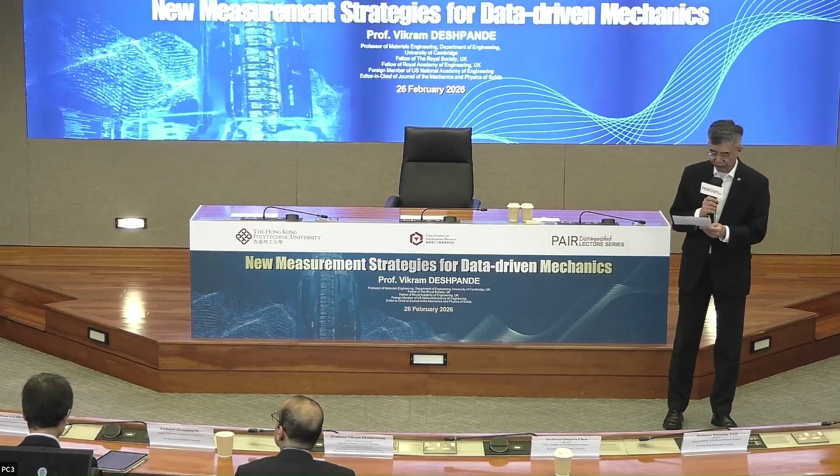He is a leading expert in solid mechanics and professor of materials engineering at the University of Cambridge in the United Kingdom. From pioneering micro-architectured materials with exceptional thermal resistance and toughness to modeling the behaviors of soft and active materials, Professor Deshpande's work has greatly advanced our understanding of complex phenomena in material science, ranging from plasticity, damage and failures in metal alloys, to how living cells and tissues sense and respond to mechanical forces. His team has delivered both theoretical and practical innovations with widely engineering impact.

Among his most notable contributions is the development of metallic wood, by engineering nickel into a porous nanoscale architecture resembling wood, he created a material as strong as titanium, yet 4 to 5 times lighter.

Other extraordinary achievements include inventing new classes of architected materials for lightweight structure, energy absorption, and shock mitigation, and developing theories and tools to improve the blast resistance of land and sea vehicles, and to evaluate the high temperature performance of alloys used in engines.

Professor Deshpande's engineering excellence has been recognized with some of the world's most prestigious honors, including awards from the American Society of Mechanical Engineers, the Society of Engineering Science, and the European Mechanics Society. He is also a fellow of the Royal Society, the UK Royal Academy of Engineering, and an international member of the US National Academy of Engineering.

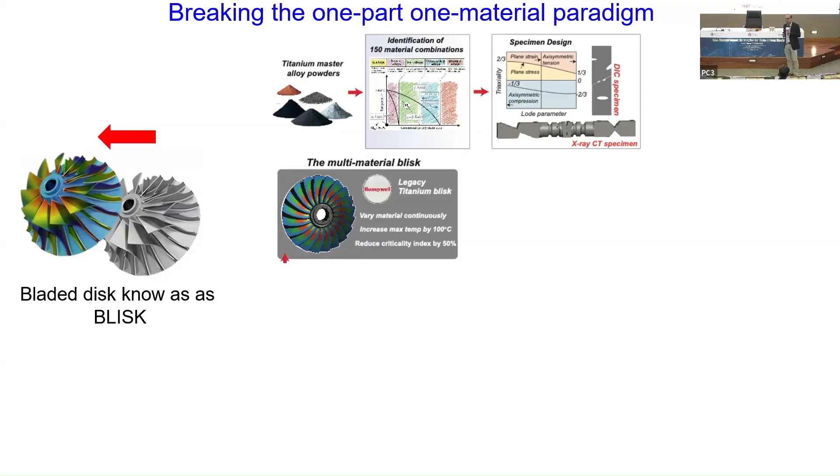Now you can make lots of different alloys by some powder routes, lots of other routes, but now you'll have to measure the properties of lots of these alloys to be able to do this kind of optimization process. So we'll have to do very few measurements, rather than doing lots and lots of measurements. So you make some complex specimen from which you can get lots of properties in one go, rather than having to do different tests.

We'll discuss this as we go along. And then you make these specimens, and then you come up with saying, how do you do these measurements on these very complex specimens?

Because you're trying to get lots of properties from one specimen. And these are different measurement strategies, essentially all X-ray based, and that's going to be one of the main focuses of the talk.

One of the things is because you're doing so many different alloys and so many different measurements, you want some autonomous way to get these measurements into some kind of a model that you'll be using. This is where our data-driven ideas come in, that you don't actually come up and develop traditional models, but you have an autonomous framework.

So that's approximately where these ideas of machine learning come in. You come up with an autonomous way from these measurements to go into a constitutive model. And these constitutive models finally will go into some kind of an optimization tool. That's what you'll then use to close this loop to understand how you can develop a multi-material design, basically, from alloy development to measurements to, of course, the final structural design.

What I'm going to be talking about today is this element of it, which are these measurement strategies. Let's assume that we have got lots of these alloys. How will you actually come up with these kinds of measurement strategies? That's where this whole idea started developing, is how do we come up with different measurement strategies? Because the traditional measurement strategies are too labor intensive, too slow, etc.

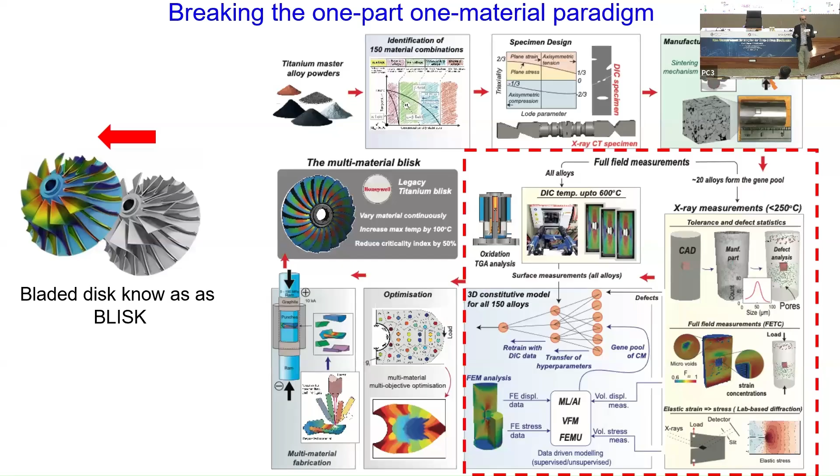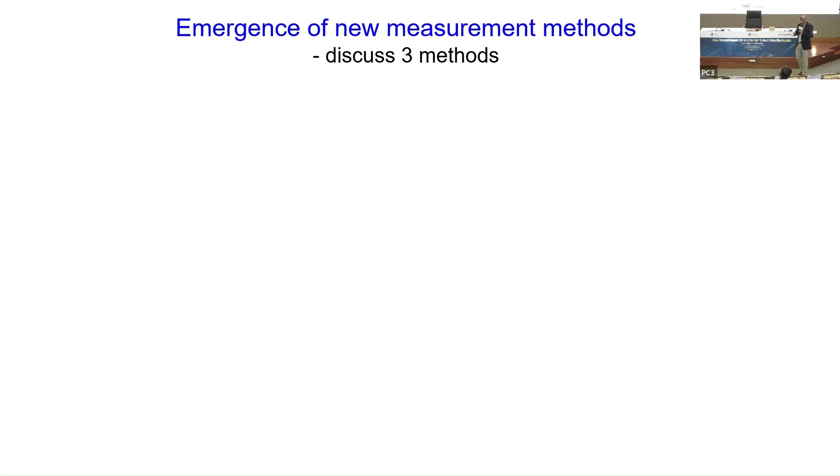Given this, now that that's the sort of broad focus, I may not come back to this problem in any great detail, but I'll focus on this real science that we're trying to do, which is the measurement of measurement strategies. And I'll discuss three methods. Two of them I'll discuss in a very bird's eye view, and one of them where we will basically talk about these physical insights, we'll go a bit more in detail.

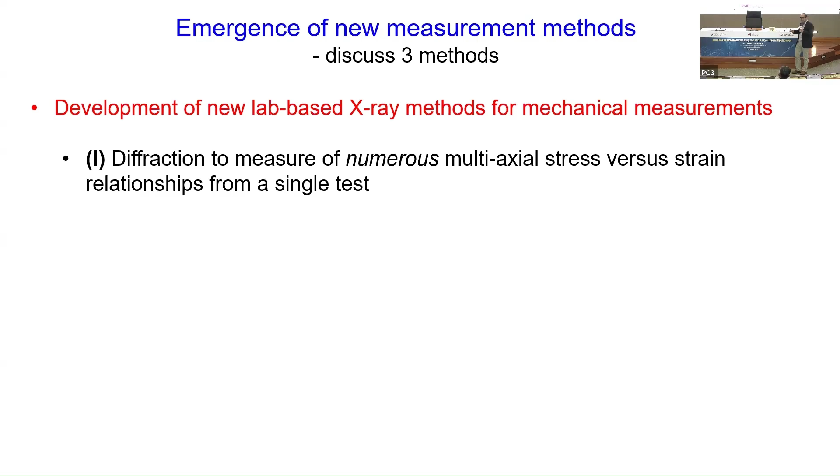So the measurement strategies are all laboratory based. We do not want to go to synchrotrons because we want to do this fast, and cheaply. So they'll all be laboratory based. There'll be X-ray methods. We'll use diffraction. You'll see what kind of things we've had to do to bring some synchrotron technologies into a laboratory for these kinds of diffraction tests so that we can do many, many multi-axial measurements with one test, basically.

We'll do high-speed tomography, so things where we'll be able to do tomography at millisecond timescales. Traditionally, tomography takes minutes to hours. And then finally, I'll also talk about doing 3D digital volume correlations. This is where we will talk about real new physical insights that are coming in, things that we never expected that we'll be able to see.

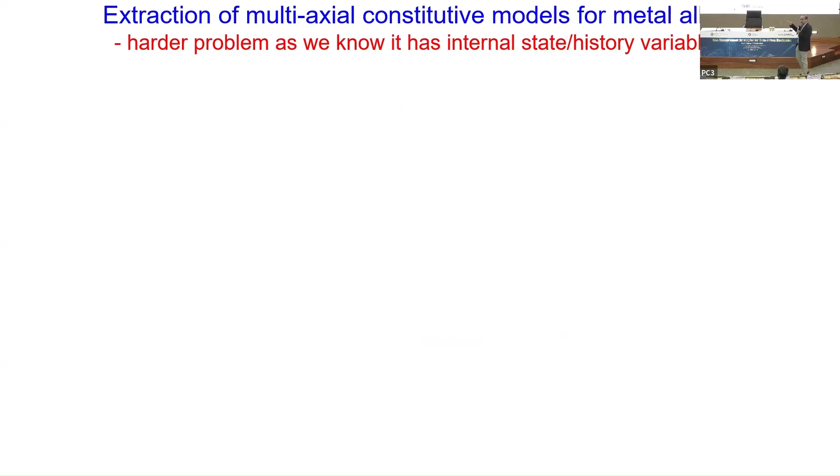Okay, so let's first talk about trying to do lots of measurements from one specimen. I'm giving it at a relatively bird's eye view. The problem is that if you want to extract multi-axial constitutive models from metal alloy, it's a harder problem, as we know that it is full of internal state variables or history variables, right? There's plastic strain, etc. So what has traditionally been done?

So you're trying to do, this is a multi-axial curve. So you have lots of these different specimens, giving you lots of different stress states. And so typically to do this kind of measurement, you need to do 50-ish tests or something like that, which takes too long.

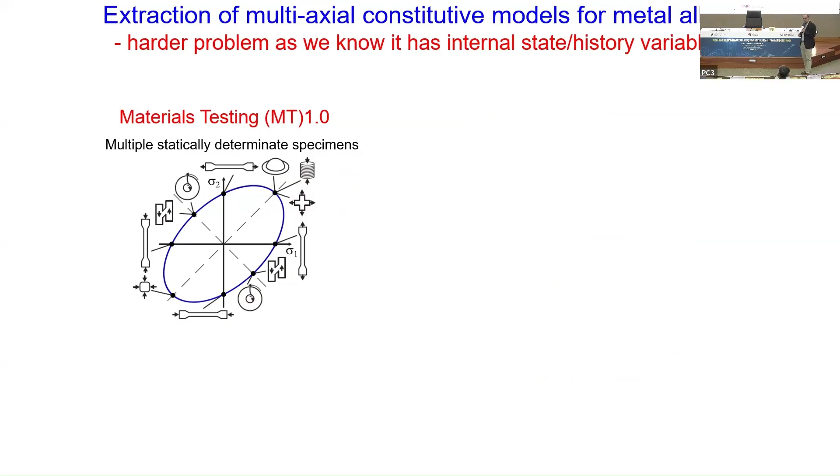An alternative method, which has been used now for the last 20, 25 years, maybe a bit more, is you design one statically indeterminate specimen. So you have effectively lots of multi-axial states triggered in this one complex specimen. And when you do that, then you can sort of maybe extract out these multi-axial properties from one specimen.

The problem here is that you only use what is called DIC, which are optical measurements. You look at the specimen and you basically say, what are the strain fields? This is like PIV or something like that in fluid mechanics. The problem with that is that you now have measurements of the strain, and now you're trying to extract what is the local stress at every point in this specimen. And that's an inverse problem. That inverse problem requires you to solve some kind of other thing, typically some kind of boundary value problem.

That's typically highly ill-posed, because effectively you are not directly measuring the internal state variables. So the question is, what can you do because this is too ill-posed a problem, and hence you need to do still lots of different measurements.

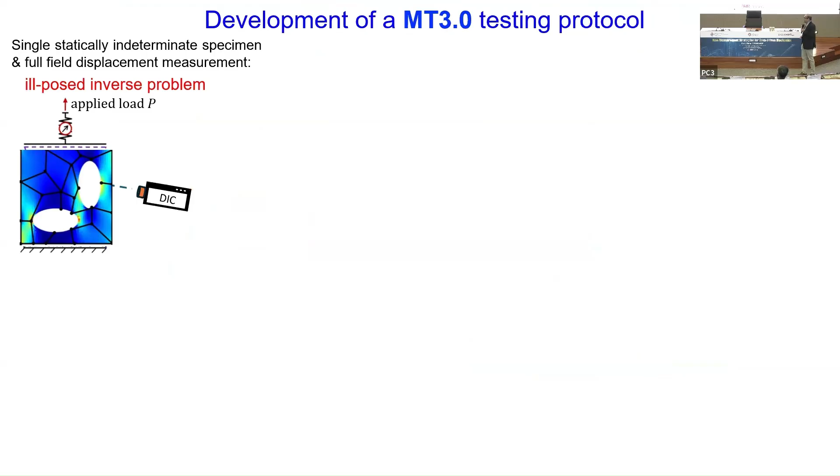So we said to ourselves, can we develop something new? This is the traditional technique, you're only doing optical measurements, and now these are these sort of ill-posed inverse problems. How can you regularize this ill-posed problem?

Well, there's one thing you can do: in addition to measuring these strains, suppose I actually measure the changes in the atomic spacing. Changes in the atomic spacing will then tell me the elastic strains, because that's what's actually generating the stress inside the materials, as the atomic bonds are being stretched.

Now, you can do that by effectively Bragg's law, which is this idea here, is that you have an incident beam, you have a diffracted beam, and basically looking at that diffracted beam, you'll be able to get hold of what is the atomic spacing.

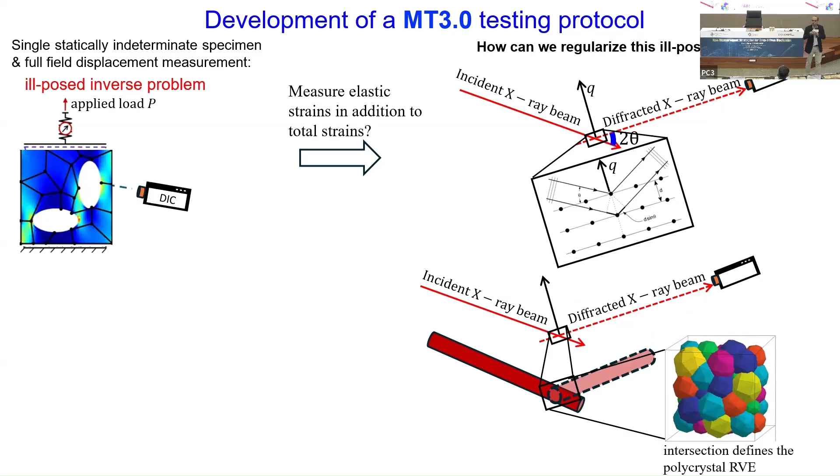Now, in reality, what you do is you don't do it for a single crystal, but just like when you're doing a computation, you define some kind of a representative volume element, which is what we have got here, is that you want to know what is the average elastic strain over that representative volume element inside this material. And that's what we'll do.

And what happens there is, as you load this, the energy spectrum, by Bragg's law, will shift from this unloaded state to this loaded state, and that will give you the elastic strain.

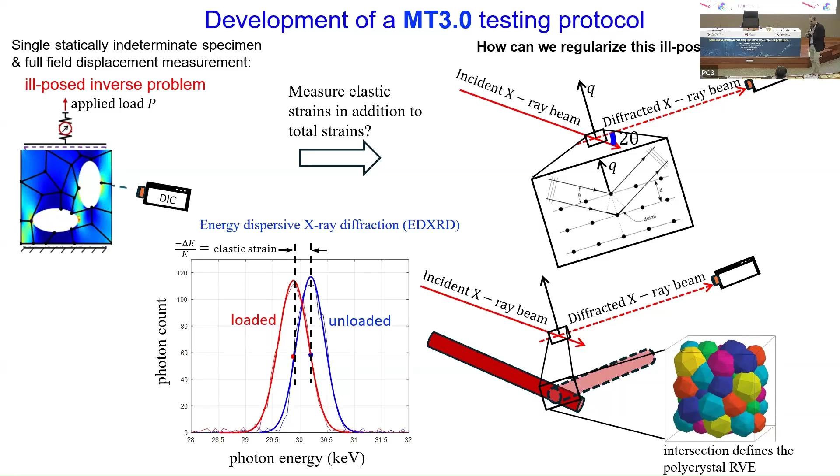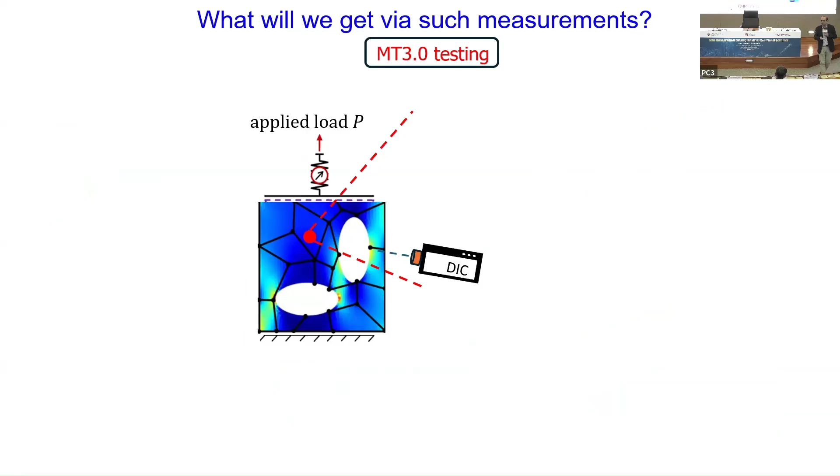So now you've got yourself this rather interesting measurement tool, where if you do this kind of a test, you not only are going to be measuring these strains using something called digital image correlation or something like that, but you'll also be measuring the elastic strains. So the total strains as well as the elastic strains.

That means you know the stress and you know the total strains. And that means that as you start loading this specimen, at every point within this specimen, for example this particular point here, you'll get a multi-axial stress strain curve. At another point here, you'll get another multi-axial stress strain curve. At another point here, you'll get another multi-axial stress strain curve, solving no inverse problem at all.

So with one test, you're going to get lots of these different multi-axial stress strain curves. And that's how you basically have reduced the problem to doing it in one measurement. One test is going to give you all that data. So that's what we are basically saying here.

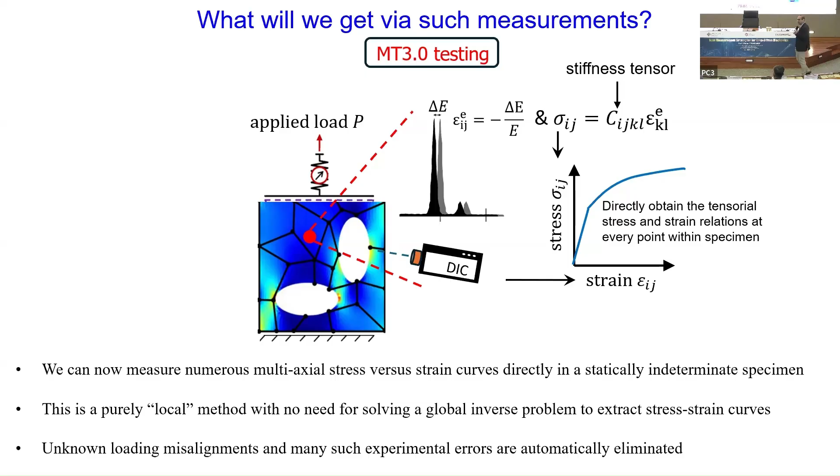And so this sort of, as a theory, is well known. It has been known for at least 50, 60 years, if not more. The question is, how do you go about doing this in a lab? Because you need to be able to do these diffraction measurements.

So this was the first thing, we needed to build ourselves a laboratory facility to be able to do this. Now, what I'm going to show you is a movie in which I will show you the main aspects of this facility that we have built to do these kinds of measurements, because these measurements have not been done in a laboratory before.

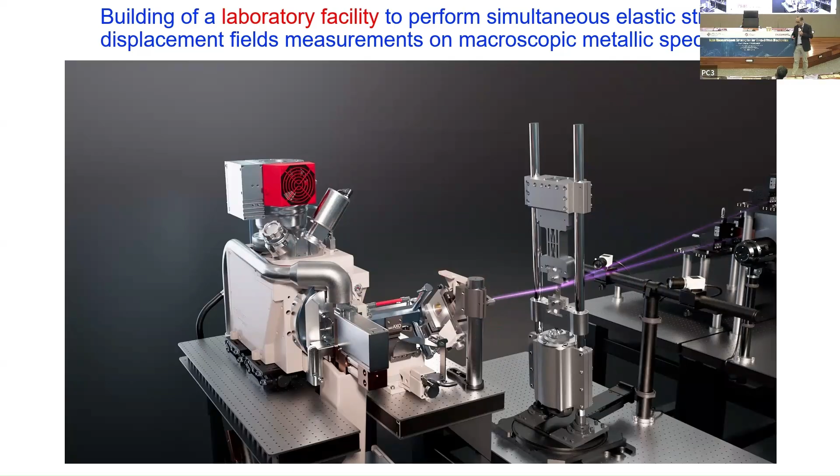Okay, so what you'll see are various different things in this movie. You'll see an X-ray source here, which consists of a metal jet, a liquid metal jet. This will be the loading apparatus, and here there will be detectors, and there will be some sort of X-ray optics sitting here. So let's just look at these various elements.

So what you're seeing here is this is the X-ray source, this is the optics, this is the load frames. We are doing DIC as well, and these are the different detectors. So let's go into that X-ray source.

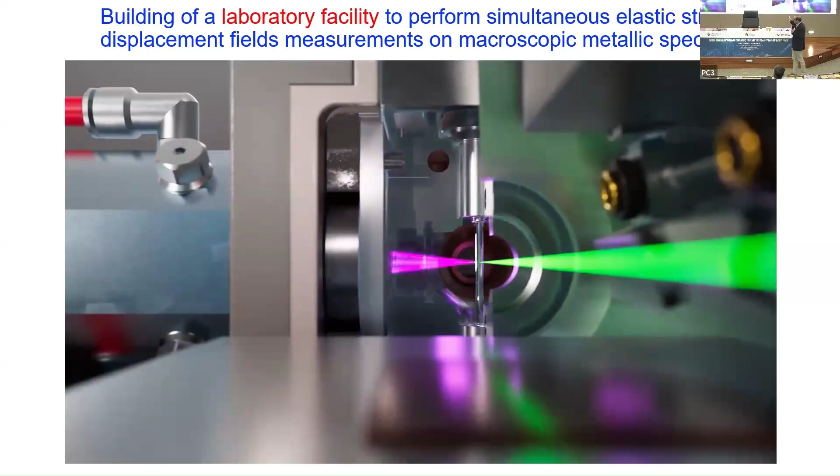That X-ray source comprises of a liquid metal jet, indium in this case, approximately 80 meters per second. An electron beam comes and hits this liquid metal jet. You get an X-ray, sort of X-rays emitted, but they are sort of in a conical shape. You have to collimate it.

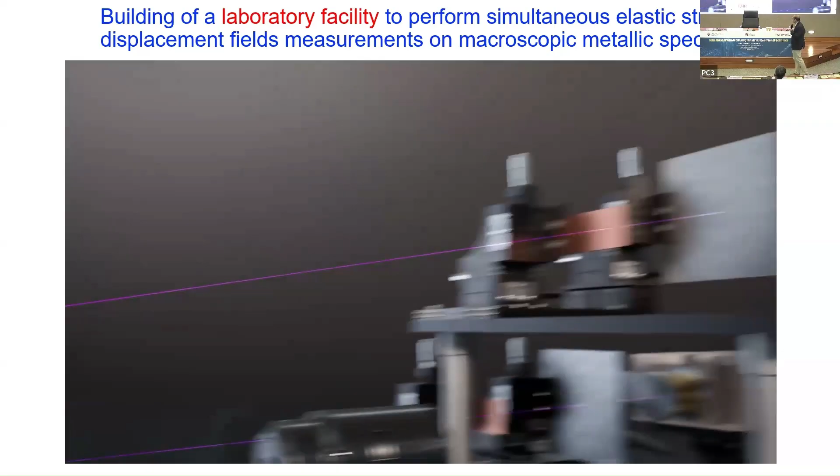And then as you get these collimated beams, they go into this specimen. They will hit this specimen. The X-rays will diffract from all these crystals, which are these crystal planes that you're seeing here. And they go into these detectors. These are very high efficiency detectors. They've been cooled to a very significant level to reduce noise.

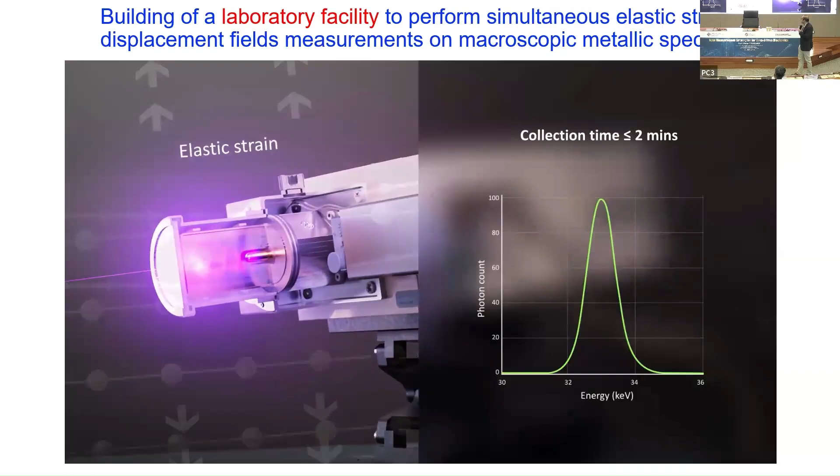And as you load this specimen, you have first this normal diffracted beam. As you load it, the spacing of the atoms changes, and the energy spectrum moves. And that is essentially how you can then get hold of the elastic strains. And then you can get effectively all this data throughout this specimen. So that's this idea about this facility.

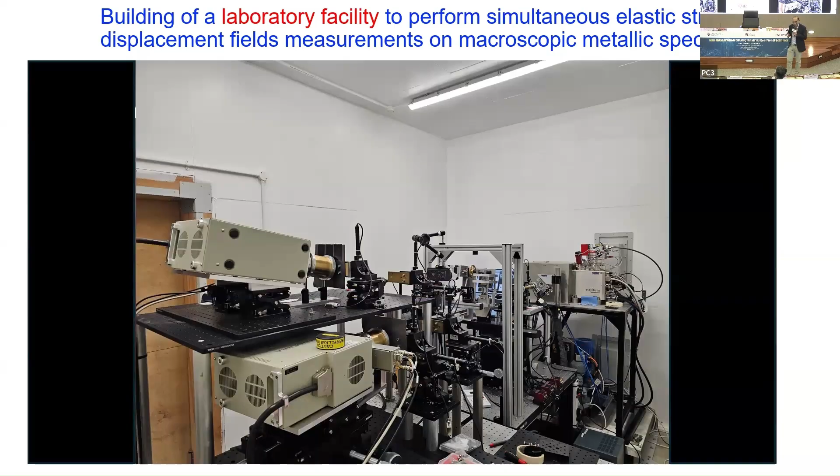And that's what it actually looks like. It doesn't look as fancy as that movie, but that's what it actually looks like. So that's what we have done. And so this is what you can get.

For example, if we have this kind of specimen, a notch specimen, at the root of the notch we get these multi-axial stress strain curves. What I'm showing you here is the measurement, these black things, and two different classical plasticity models, the best possible classical plasticity model we could come up with. It doesn't do that great a job predicting the strain hardening behavior. That's the yield surface we're showing you. This titanium doesn't behave like a typical von Mises material, as we call it in plasticity theory.

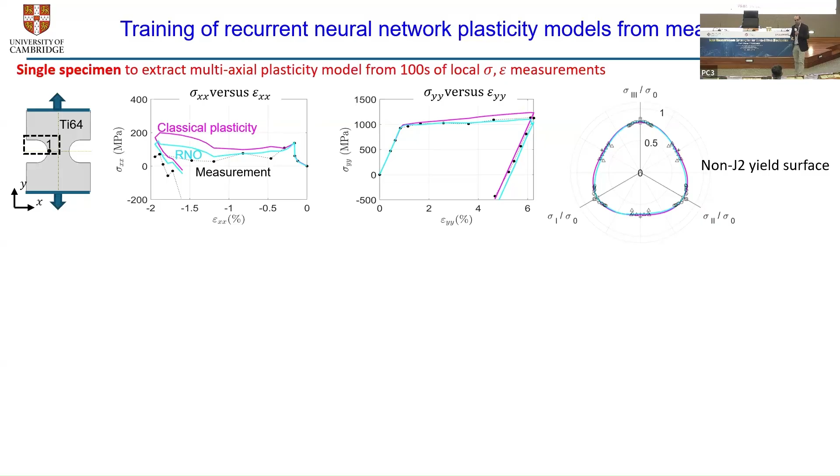We've also developed what's called a recurrent neural operator model, a neural network model. This is the comparison between the experimental data on the top row and the neural operator prediction of what that curve looks like. We used only one specimen, a simple notch specimen, to calibrate the model, and then validated it against this more complex specimen. This was an autonomous framework, going from one measurement to automatically generating a plasticity model without any real intervention. To the best of our knowledge, this is the first time from real experimental data using a single specimen that this kind of thing has been done.

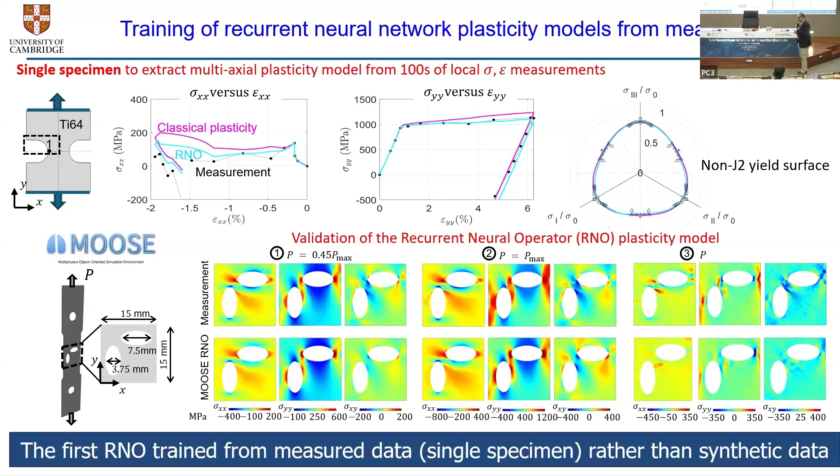So this is a bird's eye view of the first aspect I wanted to show, that you can now develop these tools which generate huge amounts of data. I didn't go on to tell you how much data is being generated, but one particular specimen gives you plasticity data of many megabytes, I'll call it, but actually the information content is much higher than just being in terms of bytes.

So the next thing I'll talk about is high-speed imaging, in 3D, or what I'm going to call 4D, because it's 3 dimensions in space and 1 dimension in time. The point is that now we are going beyond what can be done even in synchrotron.

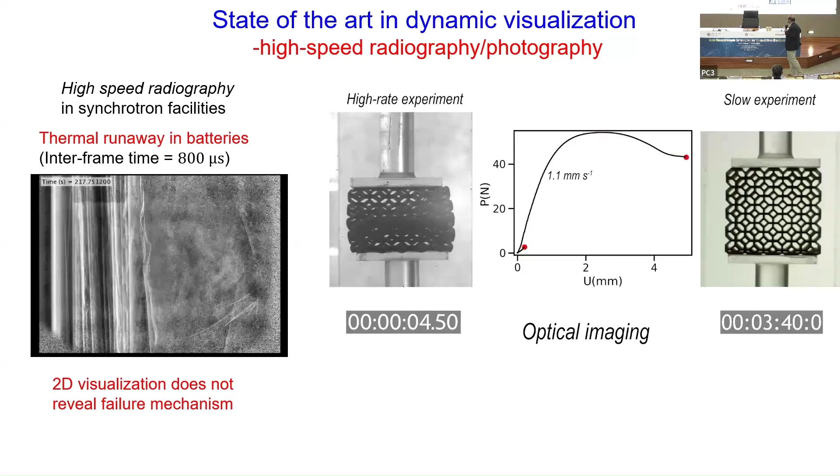There was no softening in the slow case. But if you closely observed that optical imaging, the deformation mode looked the same in both cases. So the slow mode and the fast mode look the same. But there must be something different, because there was softening occurring in the high rate deformation, and the slow rate deformation was not giving you softening. But the 2D imaging, which is essentially optical imaging, did not tell us what the difference was.

Well, if you look at the specimens in an X-ray image after the whole thing was finished, what you'll see is there was a crush band that formed in the high rate experiment. And that softening must have been due to that crush band.

But what we did not get, because we only imaged it after the event, is we could not actually observe how that crush band formed and evolved over time.

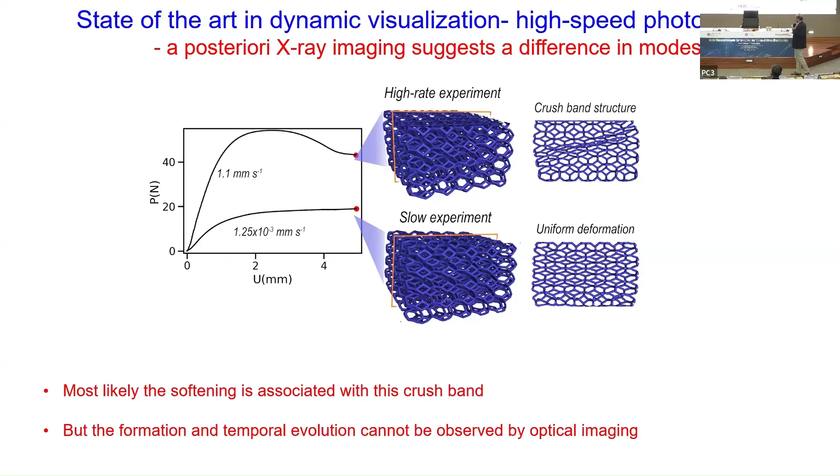So why is it that we cannot visualize this in real time? What is the problem in not being able to visualize in real time? How does tomography work? Why is it so difficult to do it?

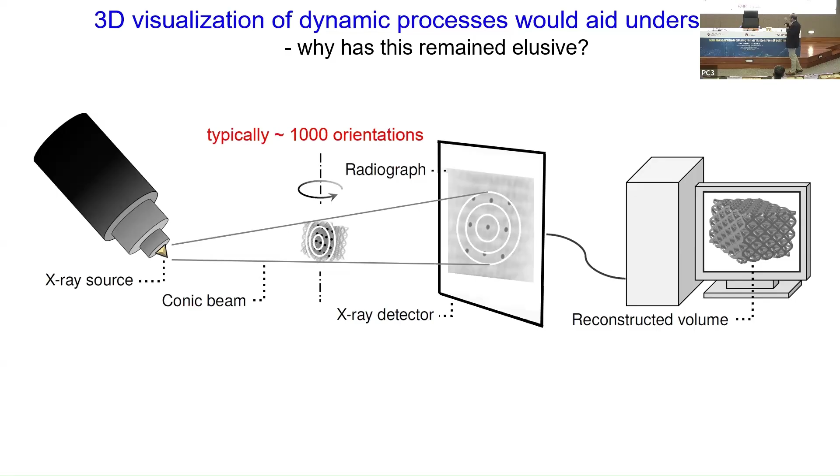In tomography, you take a specimen and rotate it over many orientations, typically 1,000 or more. You use 2-dimensional images, and then you reconstruct the 3-dimensional thing from that. So the key is that you need to take many such images over lots of different orientations, and that's what makes it very difficult to do in high speed.

So the question is, can we do this in a laboratory much faster? Can we do this very fast, i.e. not having to rotate it over 1,000 orientations? And then can we basically do high-speed tomography?

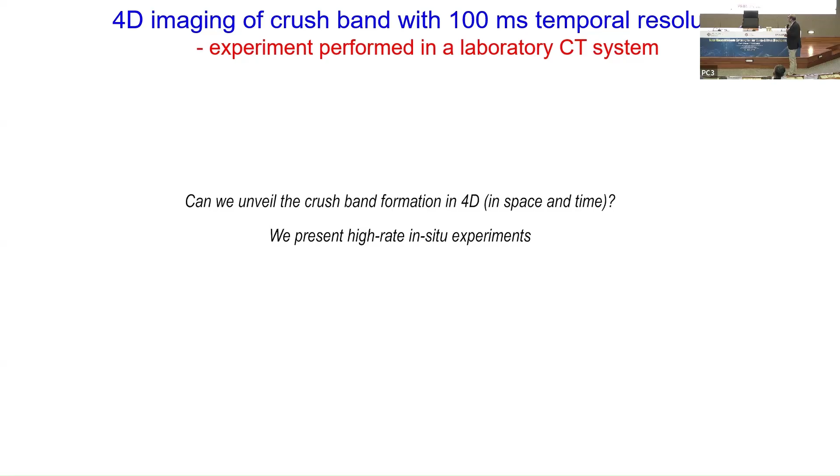So the idea here is rather simple. Of course, the implementation is much more difficult. Let's just see what I'm going to show you here. This is the real experiment we did in the lab.

We were deforming this specimen, and we were rotating it at the same time. At each instant in time, we did not actually capture the 1,000 orientations needed for a full reconstruction, but rather at each time we captured one projection at a different orientation. So the only data we have is one projection at different orientations at every instant in time. This is extremely sparse data, but can we use this very sparse data to do a full 3D or 4D reconstruction in space and time from such a sparse data set?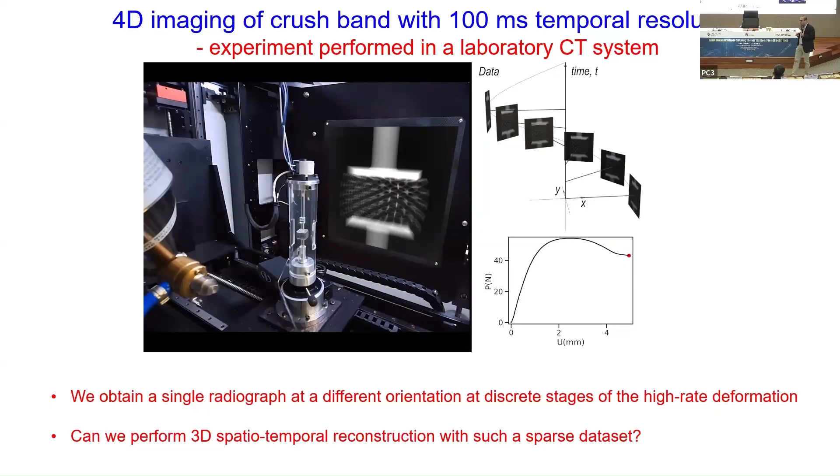At this point, we can bring in physics to see how it is that we can do this reconstruction. The reconstruction is based upon two basic ideas. One is something called neural radiance, which is one of these AI-based image processing ideas. But let's not discuss that in great detail here.

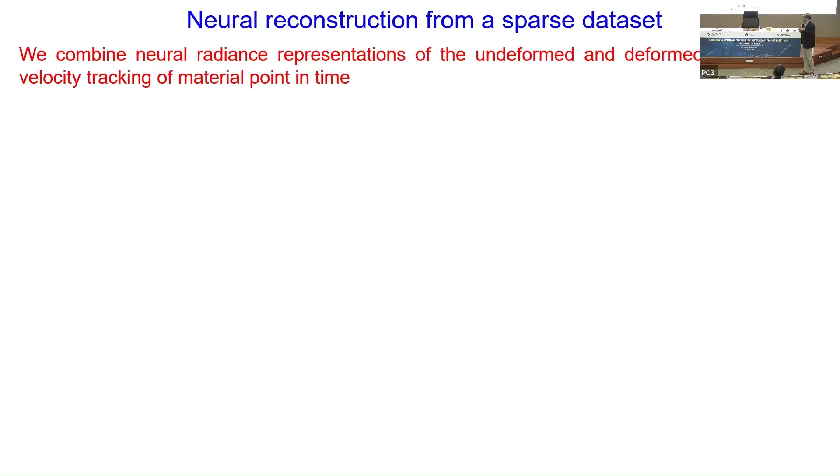The key point is that we have two static images—images at the beginning and the end. They are stationary, so we can get a full reconstruction. But in the middle, we have very sparse data sitting there.

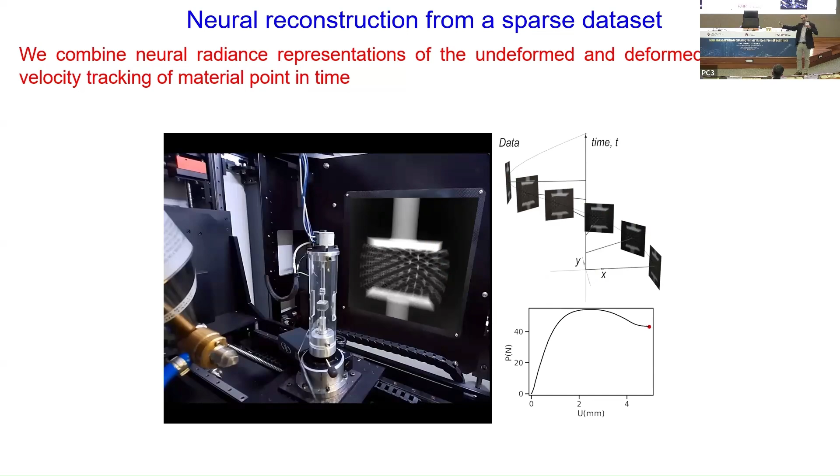But we also have the physical idea that the deformation and velocity fields that the material points undergo will be continuous in space and time. We use that idea of continuity to connect the beginning and the end with the sparse data set we have in the middle. That's what we basically do—we take that sparse data set and do these neural reconstructions.

So how does it look? This is an architected solid, and what we're going to show you here is this architected solid deforming over 4.5 seconds. You'll see that this crush band forms in 3D in a very complex way. The crush band typically forms over 800 milliseconds, and we're going to show you how it happens with a temporal resolution of approximately 100 milliseconds.

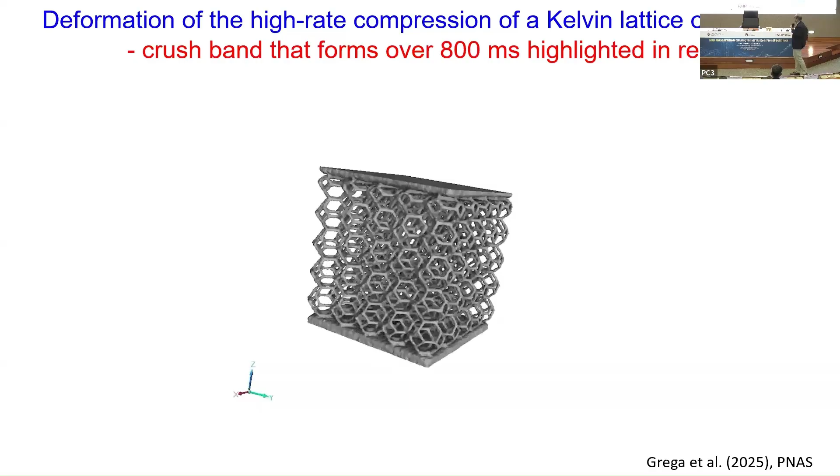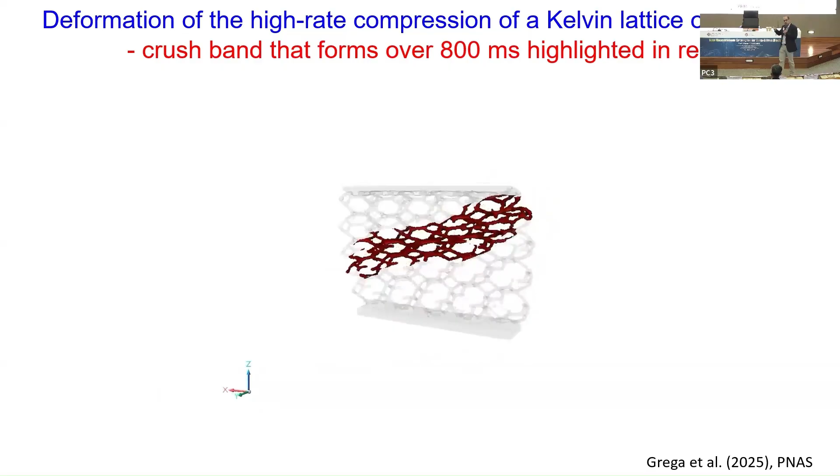So what you can see here is that we've managed to reconstruct this whole thing in a lab with a temporal resolution of 100 milliseconds in full 3D. And we think we can go even faster. This is, again, a combination of physics and these data-driven methods that has allowed us to do this kind of reconstruction.

Okay, so these first two points I was talking about were sort of data-driven ideas, but at a very bird's-eye view. I want to spend the rest of the half hour or so I have to talk about the third problem, where we are going to be doing digital volume correlation, another technique. I'm going to go into this a bit more in depth, because the original idea here was a data-driven idea to collect data in 3D that we can then use to construct models, just like what we're trying to do for the metals.

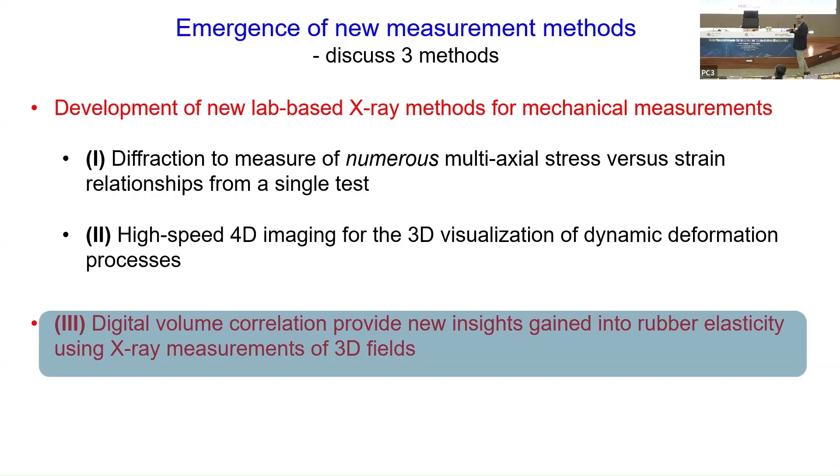What I want to show you here is actually the new physics that we are learning. I don't want to only restrict ourselves to saying that we're just developing models, but the idea is you're also sort of learning new physics here.

So now we'll go a bit more in depth to remind you, for people who don't know about this, what is digital volume correlation. If you want to do full 3D measurements of X-ray, this is essentially going to be using X-ray computed tomography and digital volume correlation together.

The idea is, of course, you have X-ray tomography where you keep rotating the specimen, get these projections, and then you do a reconstruction of the volume.

Once you have reconstructed the volume, in the deformed and undeformed state, here you have this undeformed volume, here you have the deformed volume. You basically are going to try to match how a particular element, which I'm showing here by a cube, moved from when it was within the undeformed volume to how it moved within the deformed volume.

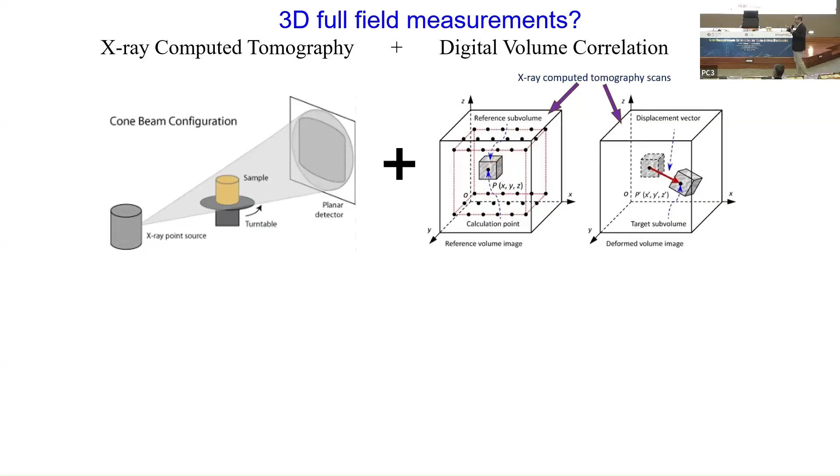If you can get hold of that mapping, at that point you've got hold of a strain field or a full displacement field, and you've got everything there. Now, to do that is not that straightforward. It's not that straightforward because how do you do this mapping from here to here?

You need to do some kind of correlation, which means you need to have some kind of microstructure to be able to actually correlate two images. Now, these are going to be three-dimensional volumes. How do you actually match them? You need to have some kind of a microstructure.

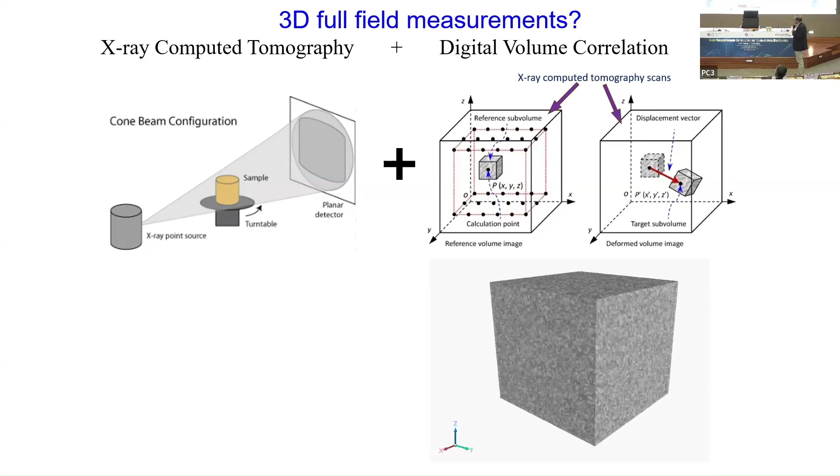Now, I'm going to take a material which has very little microstructure, which is silicone rubber. But when you look at it very carefully, you'll see that it does have a microstructure. So this is a piece of silicone rubber, and if you go deep into it, you'll see it has this kind of microstructure.

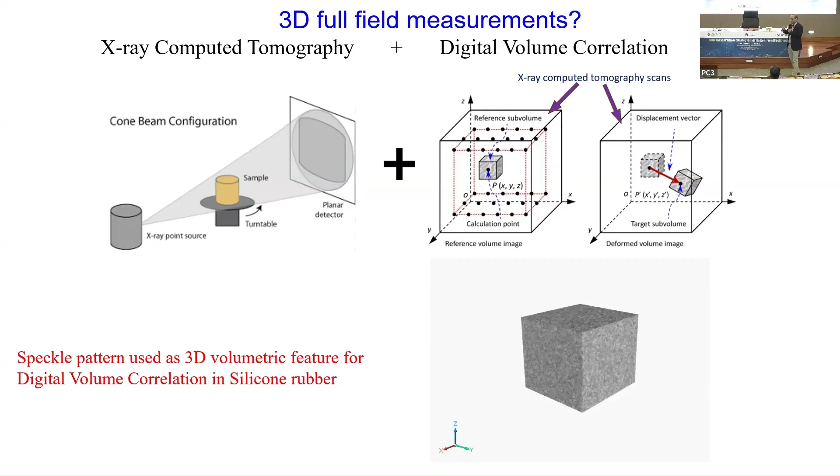This microstructure has essentially what we call a speckle pattern, and it's this speckle pattern that we will use to basically correlate one image to another image. And that's how we will be able to construct a displacement field in 3D.

Okay, so what was the question? I remind you that the original question was to say it is data-driven, so we wanted to develop a model. We were not the first people to attempt this. But what I will say is that I wanted to see whether we can learn new physics in hyperelasticity. Well, that was not the original aim, but that's what ended up happening, basically.

So to remind you, what is hyperelasticity? It's the most simple form of deformation, right? Robert Hooke was the person who basically came up with this idea 400-ish years ago. All that you have is this is a very simple material.

You have something called an energy function, which we call a strain energy density function. It's a function only of the deformation, which I'm calling the deformation gradient, which is F. And if you know that function, W, some complex function of F, then the stress is given by just the gradient of that energy with respect to that deformation. So that's the very basic idea.

So the only thing you have to do in this case, which is the simplest problem, is come up with this function W. Now, the bottom line is that many forms of this exist. The form of W—there's Ogden, Mooney-Rivlin, Arruda-Boyce. These are all the physical-based models that have existed for many years.

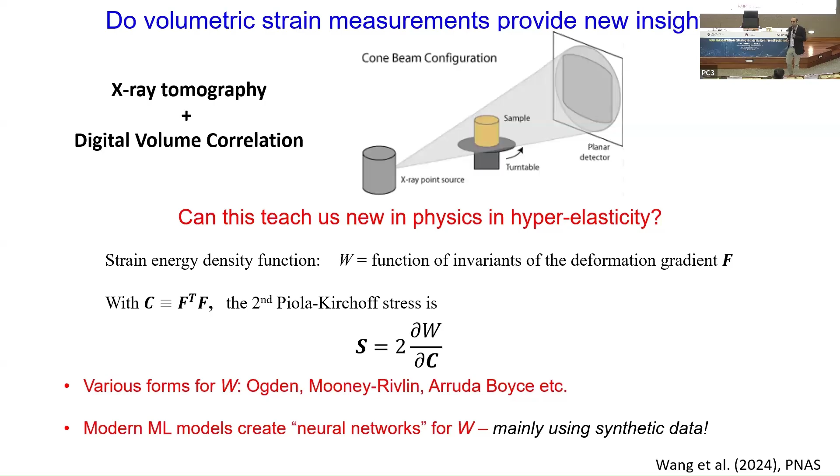This is the field where data-driven mechanics essentially started, and many neural networks have been developed for describing W. As you can imagine, that's a relatively simple task. Of course, they've all used mainly synthetic data, not measured data. And we wanted to see whether we can do the same thing with real measurements rather than using synthetic data. And what you'll see is that we're going to end up with a problem, basically.

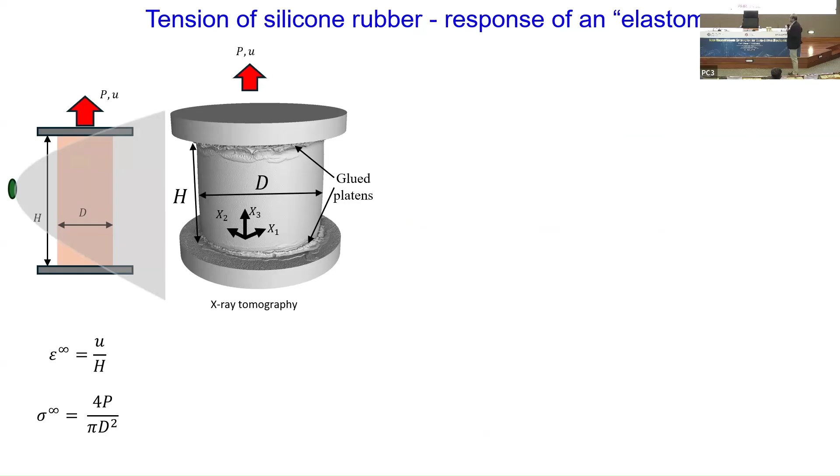Okay, so let's go to the measurements. So very simple measurements. We take a cylinder of this material, we glue it to platens, as you can see here, and then we pull it in tension.

Then you define a sort of stress-strain curve. It's not really stress-strain, it's sort of load displacement, because the strain we're defining is just the displacement divided by the height of the specimen, and the stress is just the load divided by the cross-sectional area. Nothing at all remarkable, right? You basically get a curve that is nearly linear, a little bit of nonlinearity, and nearly no hysteresis. What you'd expect in a rubber, basically.

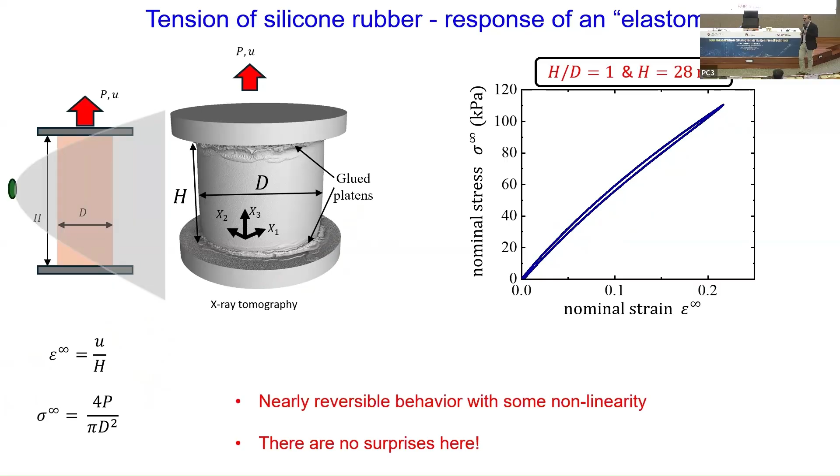You've done all these very complex measurements and you don't think you've learned anything dramatically new. So now let's see something which no two-dimensional measurement would have ever told you anything about.

And what is that? One of the things you can look at, because we've got full 3D measurements, is the volumetric deformations point by point inside the specimen, not the change in volume of the whole specimen, but each material point inside the specimen, how is its volume changing?

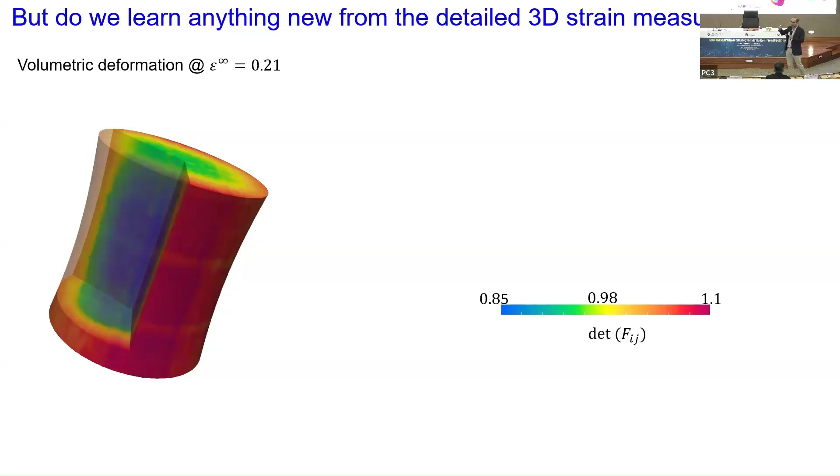We have pulled the specimen in tension. And what has happened is that there is an outer shell that has formed where the deformation gives a 10% increase in volume, and an inner core where you're losing 15% in volume. So this is bizarre, because you've pulled this in tension. Normally, if you pull it in tension, you either get no volume change or you will get an increase in volume. But what we seem to have got is this mixture of volumetric gain and volumetric loss inside this rubber.

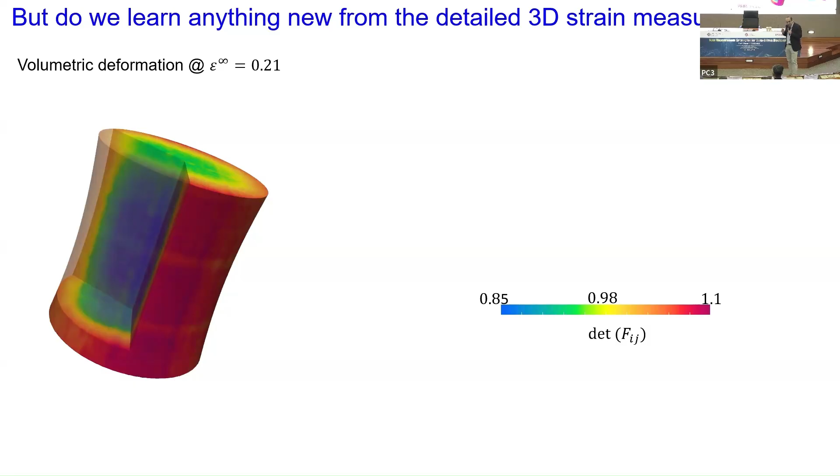But everybody would have told you that silicone rubber is an incompressible material, basically. How is this possible given this kind of measurement?

Anyway, let's look at what happens over the deformation. This is 7% deformation, this is 14%, and this is 21% overall deformation. So this problem that we're getting seems to have evolved slowly as we increase the deformation.

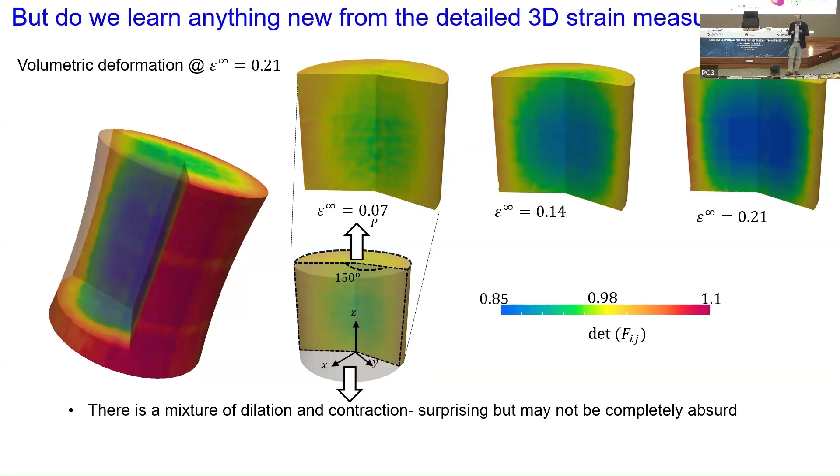But as I said to you, everybody accepts that silicone rubber is an incompressible material. Well, if I then say that this is totally absurd, that I'm getting this mixture, well, let's look at what's happened here.

I'm now taking the volumetric average of this volumetric deformation over the whole specimen. So this angular bracket means average over the whole specimen. I'm getting numbers like 0.99, 0.98, 0.99. Well, that's within my error. And 1 means no volume change, basically.

So what it's telling you is that over the whole specimen, this mixture of dilation and compaction seems to be canceling itself out, and the whole specimen is remaining incompressible. But at the local level, there is enormous compressibility in this specimen. So the literature, of course, was correct that silicone rubber at the specimen level is incompressible, but at the local level, at least these measurements are telling you it is highly compressible. So this is very strange behavior.

And of course, this was one of the first new pieces of physics that we learned of. I will not go into the details of how many verification experiments we had to do to confirm that this is correct.

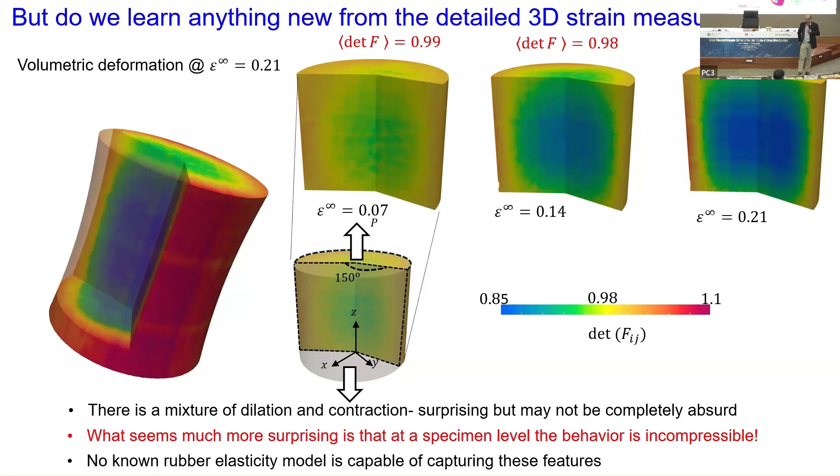Okay, so what is the problem? Is this strange behavior related to this specimen geometry, or is it something else that's happening here?

So we made specimens of different aspect ratios. This is a very long specimen. This is a shorter specimen. This is a shorter specimen. And this is the shortest specimen that you were seeing.

Now what's happening here is this very long specimen was nearly incompressible in the middle. As you went shorter, you got more of this strange behavior - a little bit of green and a little bit of red. When you went shorter, now you're getting this blue and red, and when you get even shorter, you get much more blue. So this problem seems to occur as you go shorter and shorter.

Now look at the length scale here. This is not some atomic length scale, right? This is 15 millimeters. So it seems as if at a very macro level, this specimen seems to see the boundaries, these glued boundaries that we had of the platens. Somehow this material is actually being able to see these boundaries.

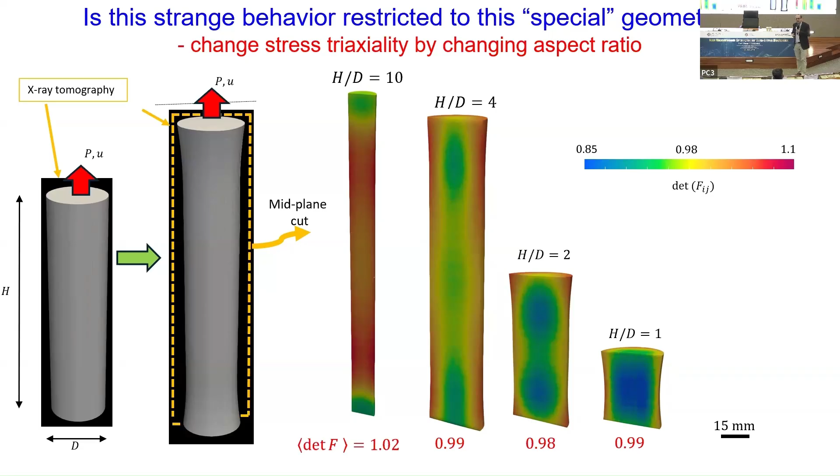The gradients that are being created because of these boundaries - okay, now if you agree that all these problems are occurring because of some boundary gradient effect, that the gradients of strain that are being created, then what else, how do you actually understand that? You need to do a much more controlled experiment.

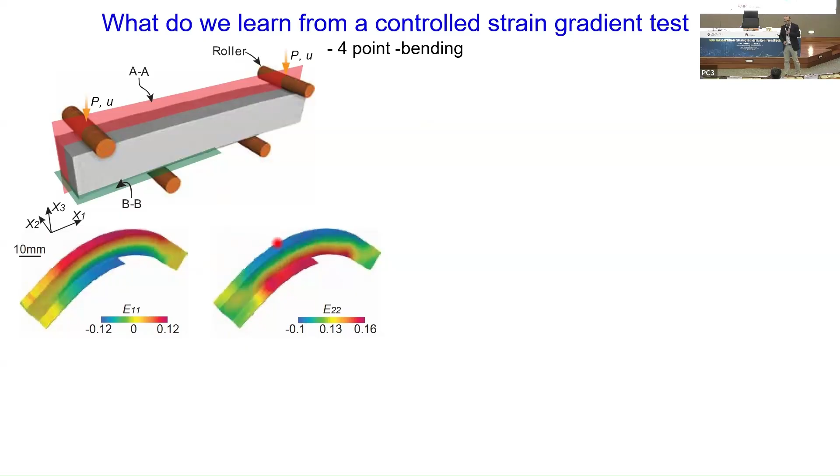So we do a 4-point bend experiment, which is the most controlled gradient experiment. You do this bending experiment like this, and now I'm plotting strains. E11, which is the strain along the bending axis, gives tension here, compression here, as you expect. This is E22, which is you're getting compression at the top and tension at the bottom - this is the Poisson effect, exactly what you'd expect. This is the shear strain, E13, nearly zero in the middle, which is exactly what you'd expect for a 4-point bend experiment.

But if you look at that volumetric strain again, which is now determinant of F minus 1, you get really bizarre behavior. What you observe here is that on the compressive side, I'm seeing red - that means I've got a 10% volume increase here and approximately a 10% volume decrease on the tensile side. Now this seems really bizarre that I'm able to get a 10% volume increase on the compressive side.

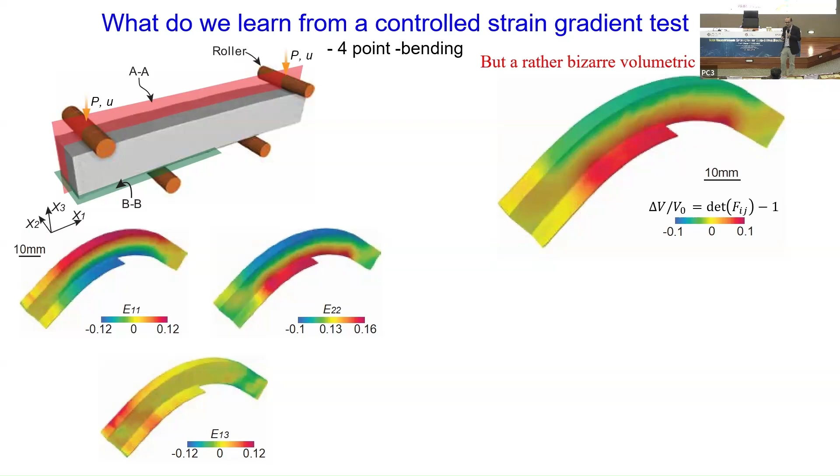And this is not some surface artifact. In fact, this was an internal section that we were showing you because these were all from X-ray measurements. If you walk through the specimen, you get basically the same thing - it's pretty much all through the specimen.

Now it's clear that this is a problem. This is a problem because this would tell you that if you believed rubber elasticity, I'm going to get a negative bulk modulus, because we know that on the compressive side, the stresses have to be compressive, which means that if the volume is increasing, I'm getting a negative bulk modulus.

And silicone rubber, we can hold it in our hands, we can play with it. It's a perfectly stable material. It doesn't have any negative moduli, basically. So there must be some other physics happening here which we have missed, which is what we now need to investigate.

And so this is the sort of thing that happened in this project. We started off saying that we're going to get data by which we're going to develop these models, and then we realized that our starting physical assumptions are wrong. So at this point, you have to start to hypothesize all the possibilities of the different kinds of physical ideas that are going wrong.

Now, the first thing you realize when you think about it from a thermodynamic perspective - how can you get a negative bulk modulus? Well, you can't really get one. But the idea about a negative bulk modulus is only happening because you've said that the stress only depends on strain and nothing else. If you say to yourself that the stress depends on strain and some other internal variable, then thermodynamically something else is happening. So the question is: is there any possibility of another state variable effectively existing for this rubber rather than just strain?

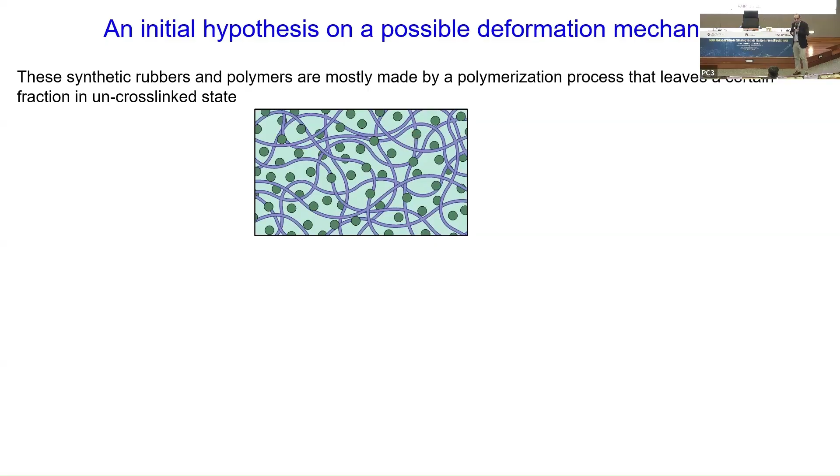If you have that kind of an idea, then this is what will happen: if you compress on one side, these uncross-linked molecules will move from one side to the other. That's what gives you a mobile species developing inside here, and that gives me this additional state variable that I'm looking for.

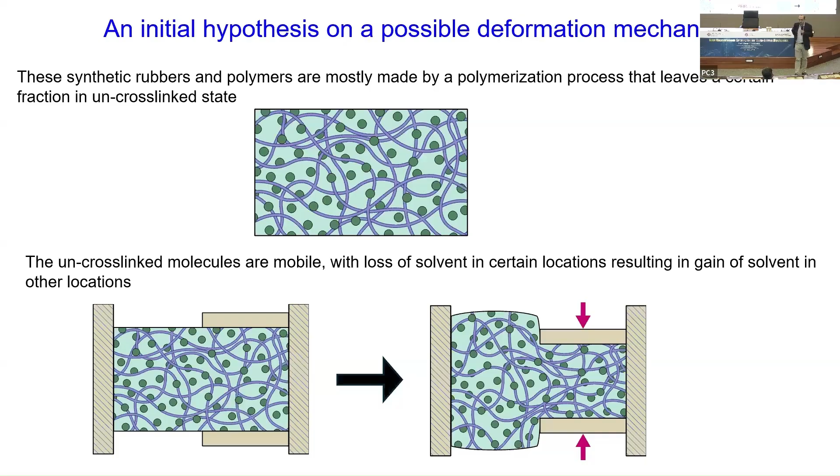Now, of course, we were investigating lots of different hypotheses, but this is the one that worked. So let's assume this is correct, that you have a mobile species inside here. Can you actually prove that such a mobile species exists? Can we directly see whether this mechanism holds?

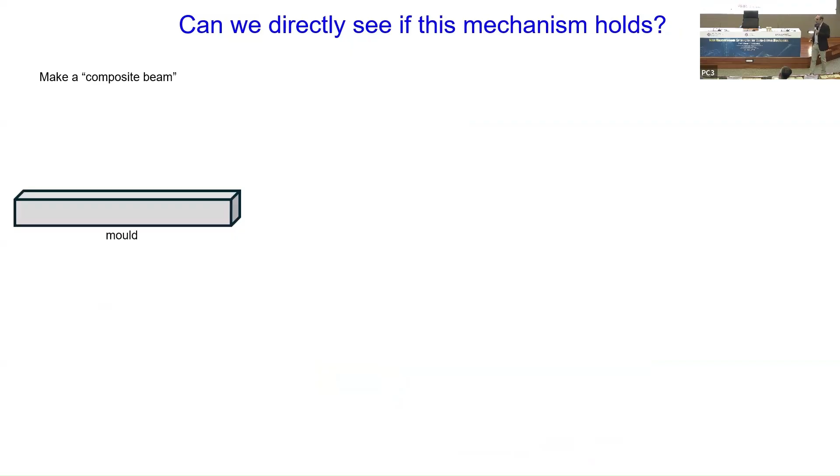So let's make another specimen. We take a beam, and we make half of that beam with silicone rubber, but we add a little bit of zinc iodide. Zinc iodide is interesting because iodine is very X-ray opaque, so it acts as an X-ray marker. It acts as a tracer, but it also sticks to silicone rubber molecules, so if this zinc iodide moves, I'll be able to see it with my X-ray method.

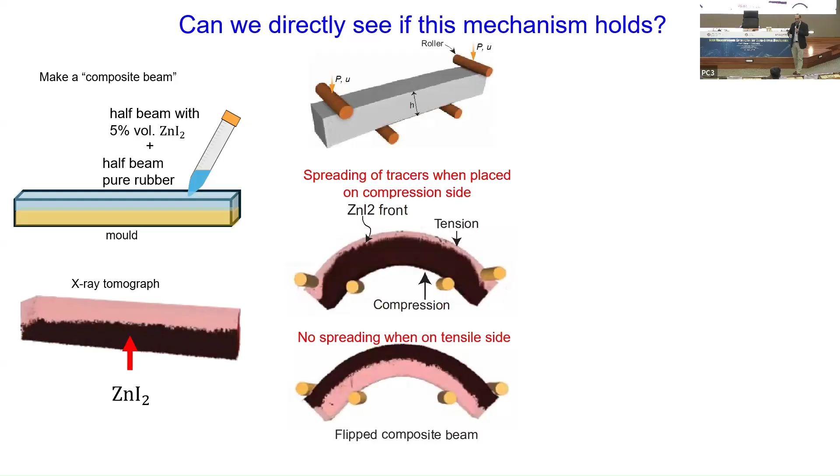So if I look at this beam, this is what I've made up. I do this experiment, and this is what happened: all this black stuff which was sitting at the bottom has moved to the top the minute you do a compression experiment. When you do a tension experiment, it all remains on the same side, it doesn't really move at all. So this proved to us that there's something moving inside this material.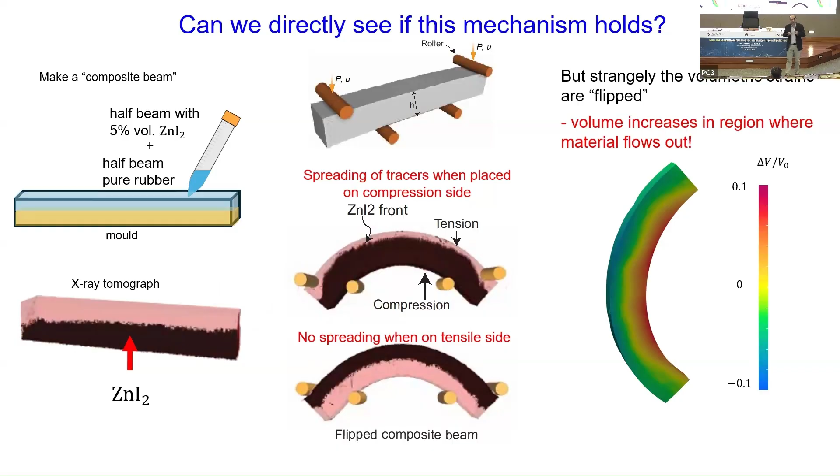And of course, this strange behavior remains, that you get this flipping effectively, the volume increasing on the side where this material is moving out from. Because the material has moved from the compression side to the tension side, volume is increasing on the compression side, and decreasing on the tension side. So how can you explain that? Well, effectively, the negative hydrostatic work must be compensated by a positive shear work, or distortional work.

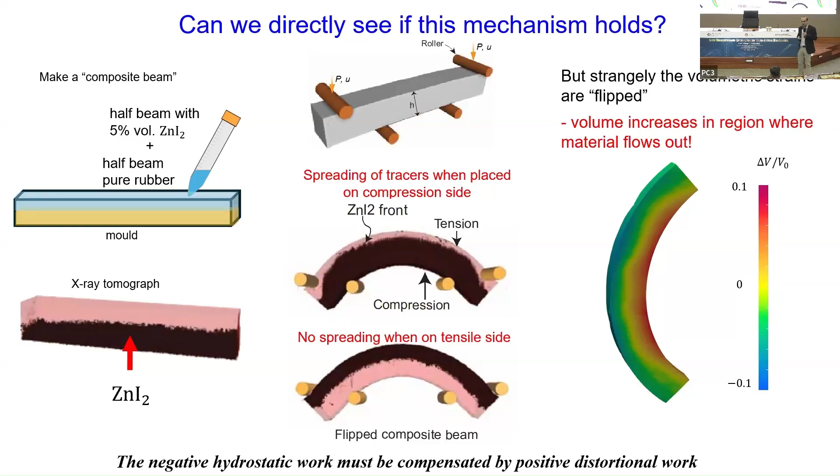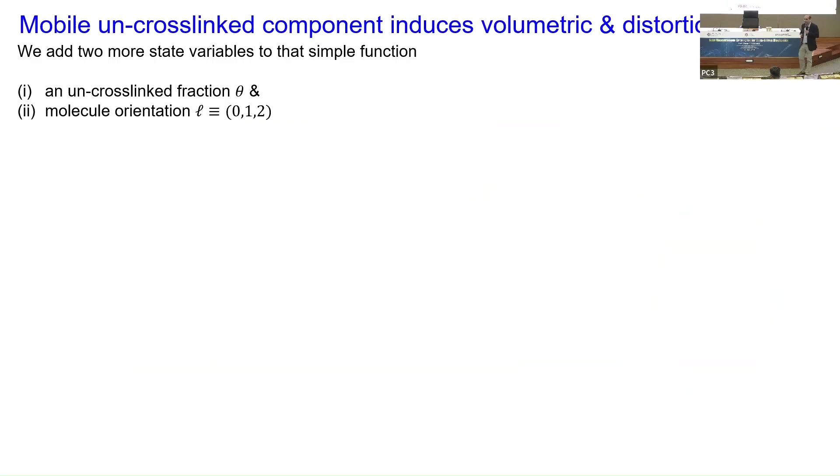Now, because I'm told I have only 10 minutes left, I'm going to speed up a little bit. You can develop a thermodynamic theory, and this theory means that you've added two more state variables to the problem. In addition to strain, you've also added a concentration of this mobile species and the orientation of the mobile molecules. You can now turn the handle of developing this kind of theory: you have an elastic energy, a distortional energy, and you can define all these conjugates, etc., and solve this problem.

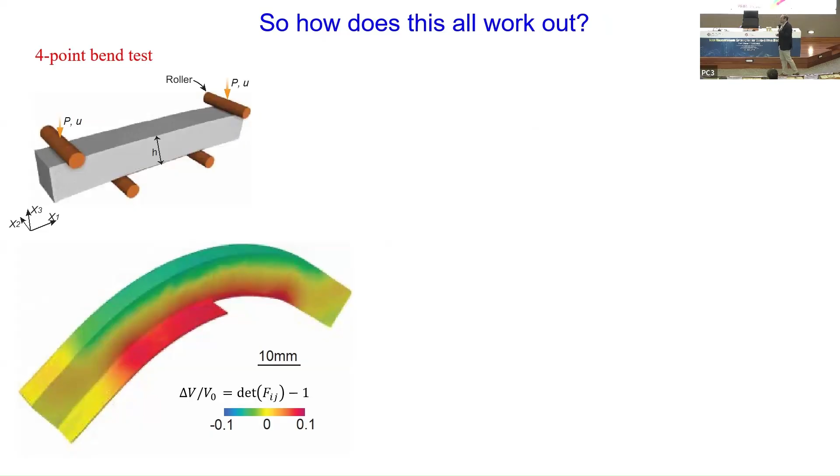So what happens when you actually solve this problem? Now that you've got a consistent theory with this additional state variable, if you look at what it's predicting, it's predicting exactly what we were observing: on the compression side, the volume has increased, it's positive, and on the tension side, the volume has decreased, and the experiments and simulations match. But the mobile phase concentration goes the opposite way: on the tension side, the mobile phase has increased, and on the compression side, the mobile phase has decreased, very much like what we were measuring.

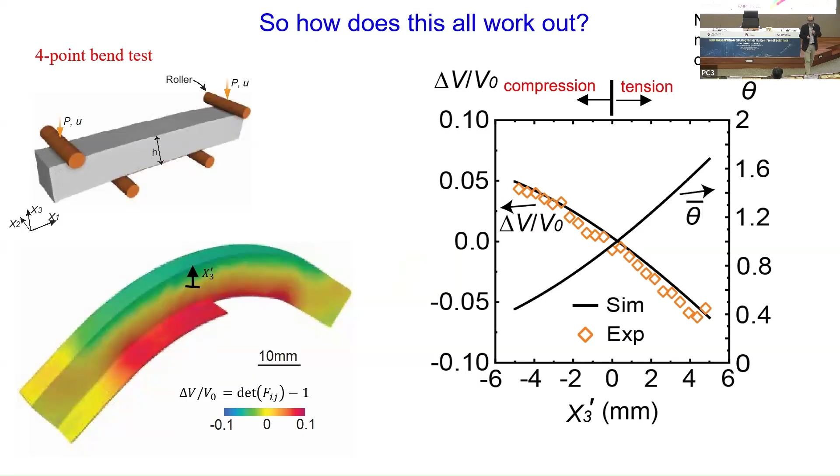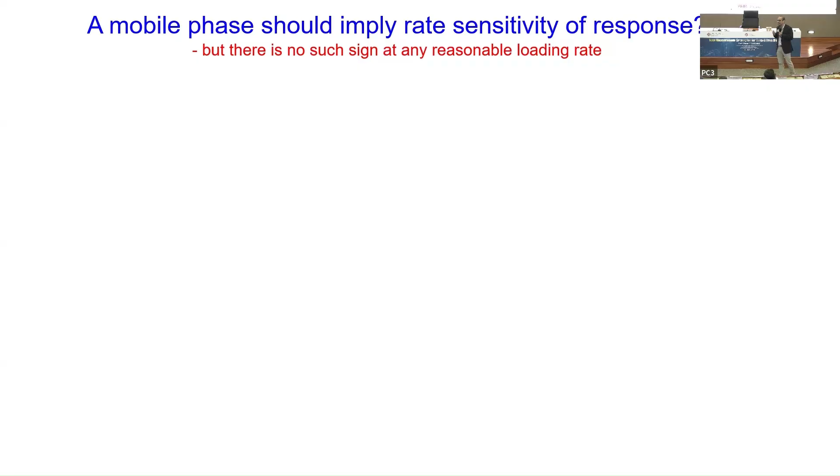Okay, so this all seems to work out, but there's one problem that occurs: if something is moving, there has to be rate dependence in the problem. How can something move and not have rate dependence? But I said to you that this is rubber, and actually speaking, there's very little evidence of rate dependence, negligible hysteresis.

If you do a relaxation experiment, there's negligible relaxation. So there is no evidence in this case that over the rates we are looking at, you're getting any kind of rate dependence. So how is it that something is moving with no rate dependence?

It would basically say that the diffusion rates of this mobile species inside this material are extremely fast, crazily fast, in fact, 50 times faster than water in a hydrogel or something like that. Well, this is where I'm going to end, basically. I can't tell you why it's so fast, but I'm going to come back now to this idea about high-speed tomography and high-speed radiography.

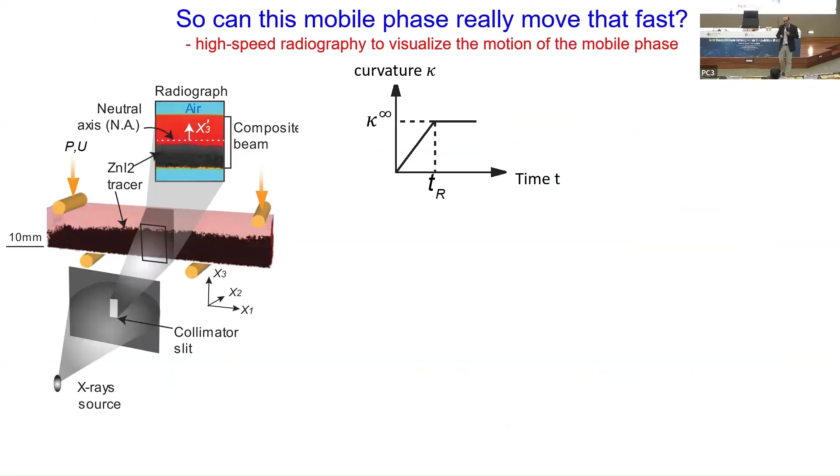We actually looked at how fast it is moving. And this is the last experiment I'm going to show you: what's here is the blue. This is a 4-point bend experiment. The blue is air, the red is pure silicone rubber, the black down here has the zinc iodide, and the blue here again is air. This whole thing is going to move up as we do this 4-point bend experiment.

What you will see here is that this black front moves nearly 5 millimeters in 4 seconds, basically. And it's moving so fast that it is keeping up with the rate at which I'm deforming the specimen. Because it is keeping up, I am not observing any rate dependence in this problem. Because at every step, this is essentially remaining in equilibrium, since the diffusion is not occurring slowly.

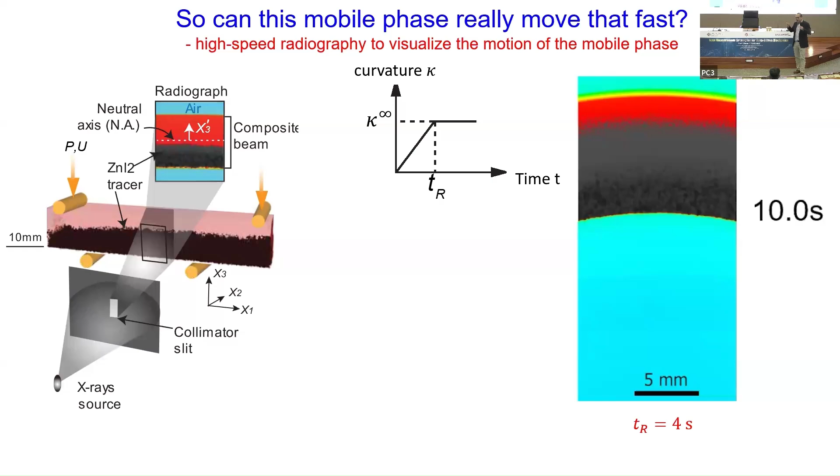Now, what is the process by which this diffusion is occurring so fast? I don't know. But this is this new physics that was being shown up. The last thing I'll say is that this actually exists in nearly all, at least we've been finding it exists in lots of materials which are made by some kind of a cross-linking reaction.

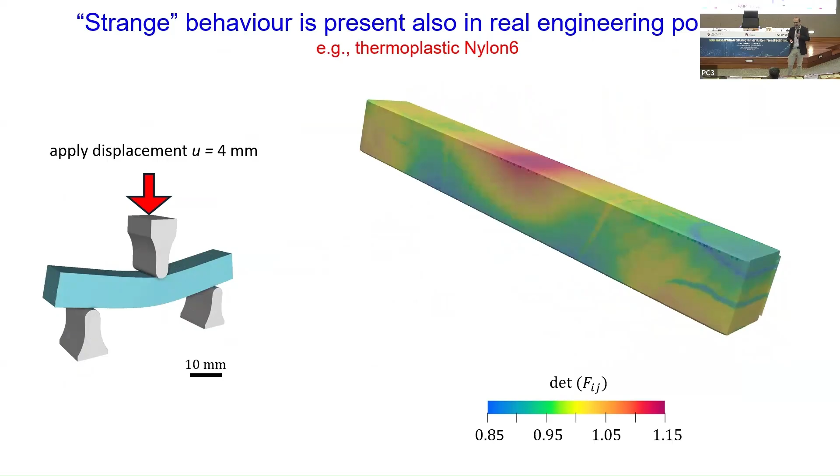This is 3-point bending of nylon, which is again an engineering thermoplastic, and the same thing has occurred here. You will see here that you're getting effectively compression on the bottom and volumetric gain on the top, basically, just like you were seeing for that silicone rubber. So this feature seems to be relatively ubiquitous, at least for lots of different kinds of materials.

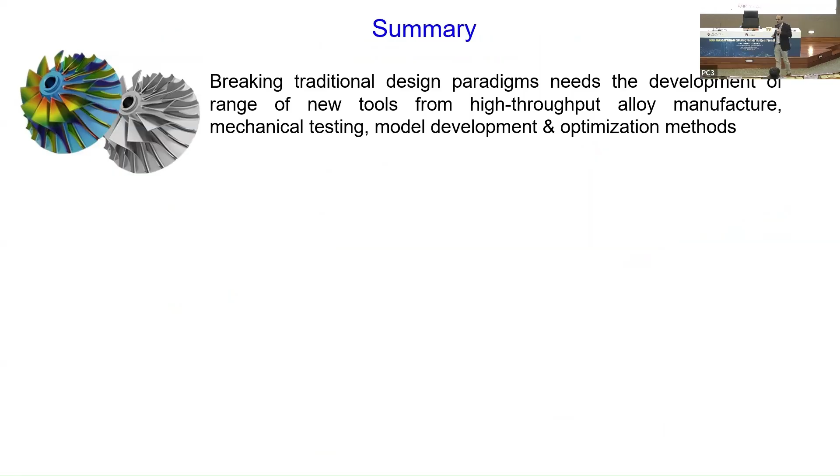So I'll end by summarizing: if you wanted to break this traditional idea, which is how we started this, of a single material component, you needed to develop new optimization tools, measurement tools, data-driven tools, etc. We started by developing those data-driven tools. But the interesting thing that came out from all that was not just that we had to develop data-driven methods, but it opened up new physics, basically, and to me that was very exciting, that in the process of developing that, we are learning new physics.

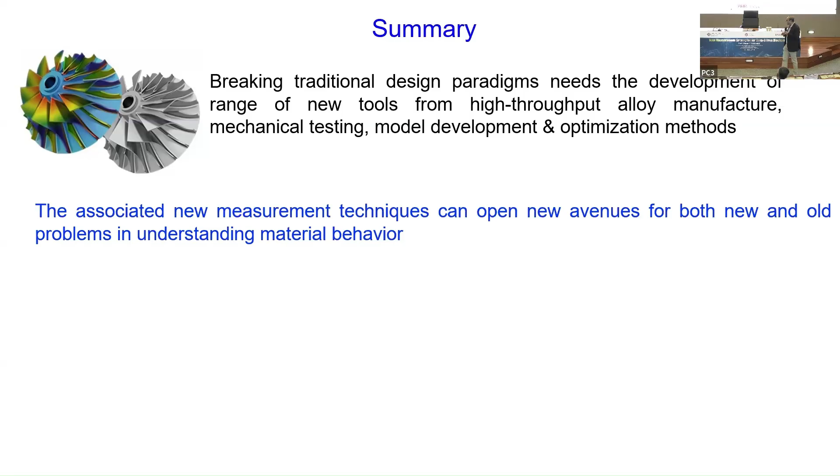What we have basically learned is that we can develop new lab-scale techniques for doing 3D measurements, high X-ray fluxes, high sensitivity detectors, new reconstruction methods like those neural rendering methods. And we are democratizing synchrotron technologies. I think this is really important because with synchrotrons you can do very few experiments, and they're really expensive, but if you can bring those techniques into a laboratory, that opens up a whole new bunch of science to be done, basically. So thank you very much.